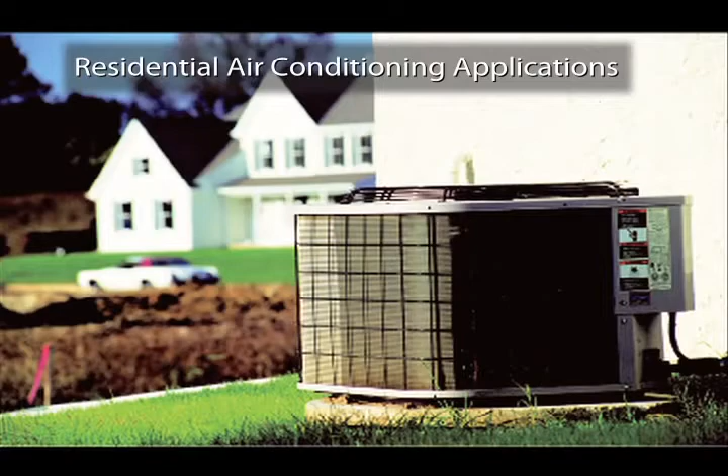Today we're going to look at Danfoss's TR6 thermostatic expansion valve. The TR6 is an air conditioning thermostatic expansion valve and is sold to many leading U.S. residential air conditioning manufacturers for use in their products.

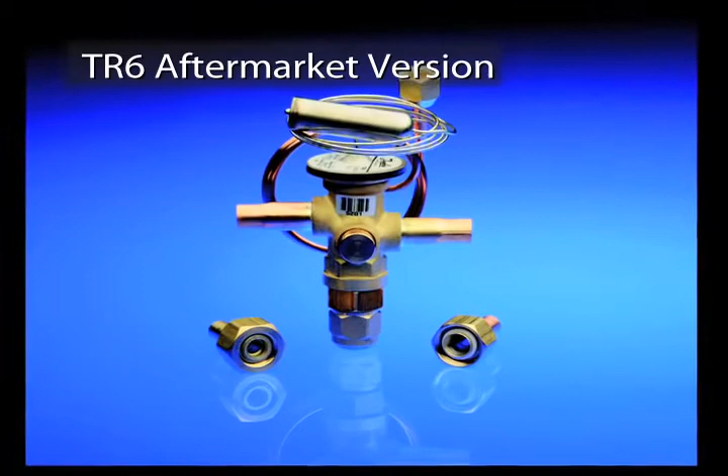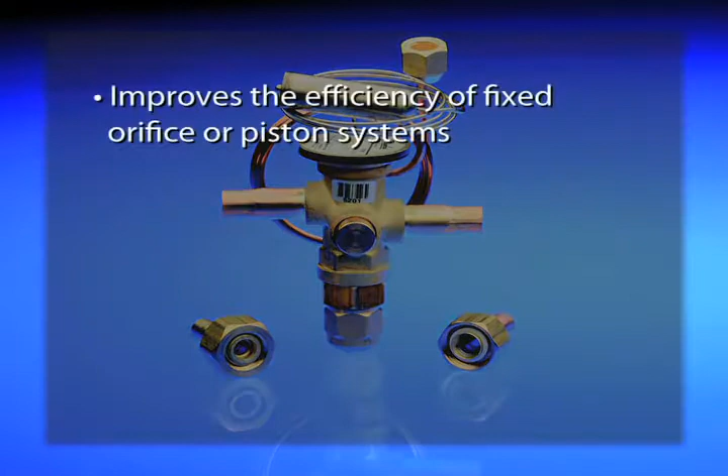However, Danfoss has also created a version of the TR6 that is designed especially for aftermarket use and includes additional fittings to simplify installation. The aftermarket version of the TR6 is typically used for four primary purposes: to permit a contractor to improve the efficiency of a fixed orifice or piston residential system, as an easy replacement for an OEM thermostatic expansion valve, to improve the efficiency when installing a new aftermarket evaporator cased or uncased coil, or to maximize system efficiency when replacing an outdoor condensing unit.

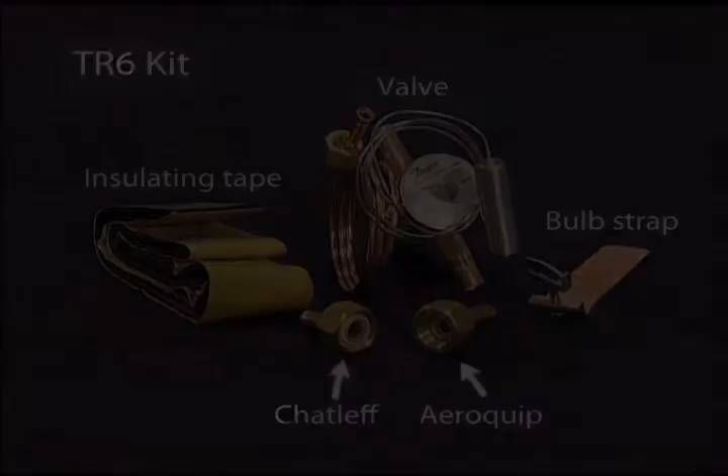The TR6 kit comes with everything needed for installation, including a valve, bulb strap, insulating tape, and the two most common types of evaporator fittings, Aeroquip and Chatleff. With these two fittings and the valve's 3/8-inch ODF connections, the TR6 is an ideal replacement for most air conditioning thermostatic expansion valves. And the aftermarket version of the TR6 has a superheat spindle that can be adjusted when necessary to meet a system's needs.

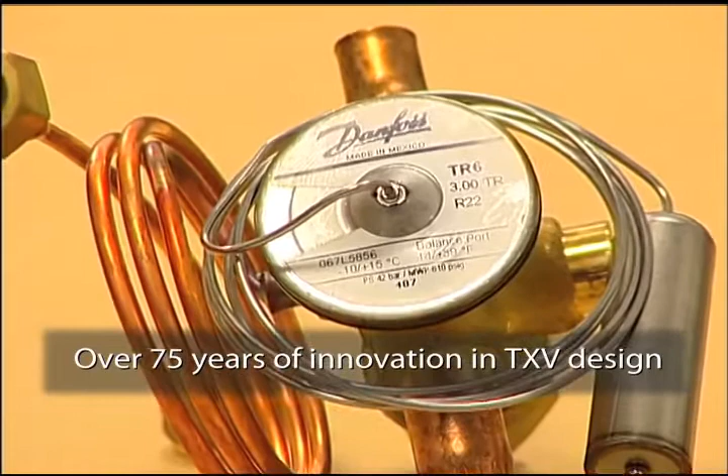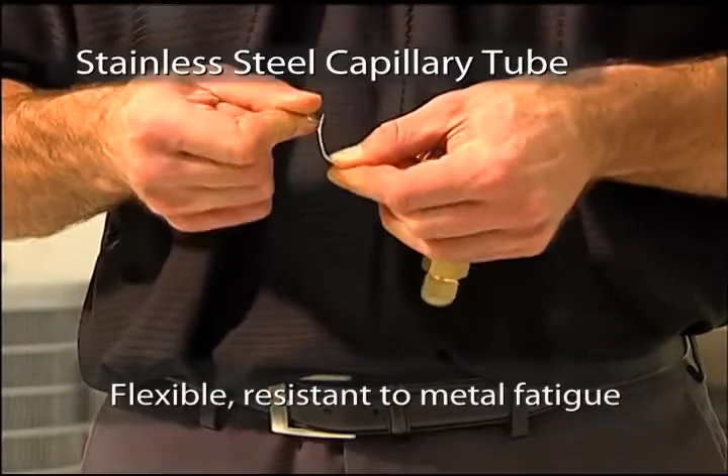The power element is a result of Danfoss's 75 years of innovation in TXV design. We've identified the most common power element failure points and designed them out of the valve. Because we use stainless steel for its construction, the cap tube is less likely to break due to this metal's flexibility and durability, and the power element will not rust due to stainless steel's resistance to corrosion.

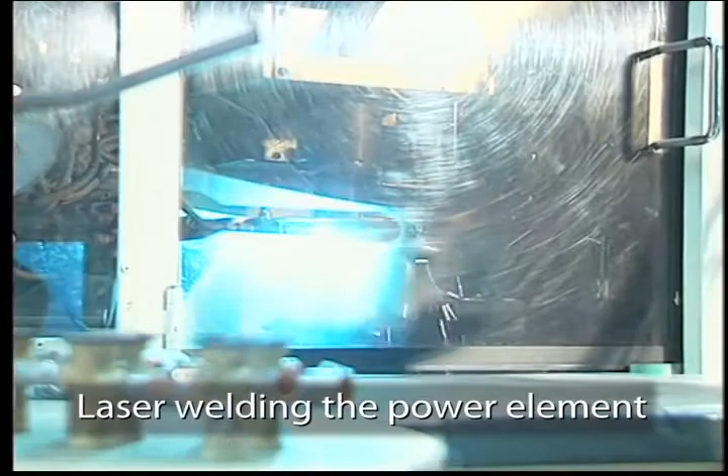Danfoss laser welds the power element rather than using plasma welding. Unlike other welding processes, laser welding directs heat only to the joint and reduces metal fatigue to the diaphragm, which means the diaphragm is less likely to fail prematurely.

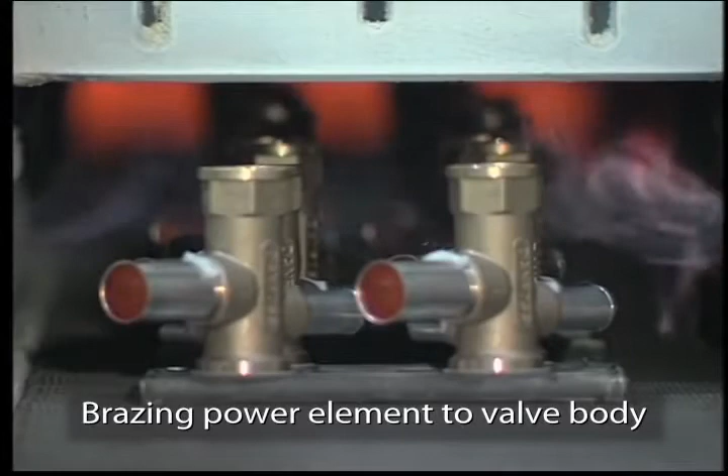By brazing the power element to the valve body, Danfoss has eliminated the primary point of refrigerant leaks in TXVs. Also, a brazed power element prevents outside debris from coming into contact with the diaphragm, something very likely given the dirty environment in which TXVs are typically installed and serviced. Very small particles of debris have been shown to rapidly wear through the diaphragm, greatly reducing TXV lifespan.

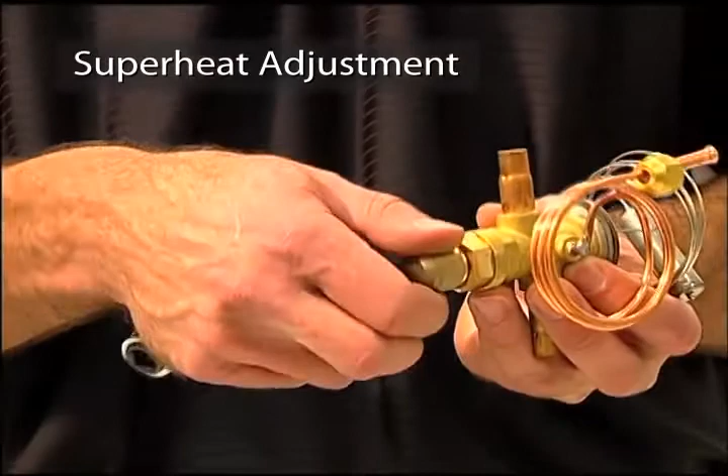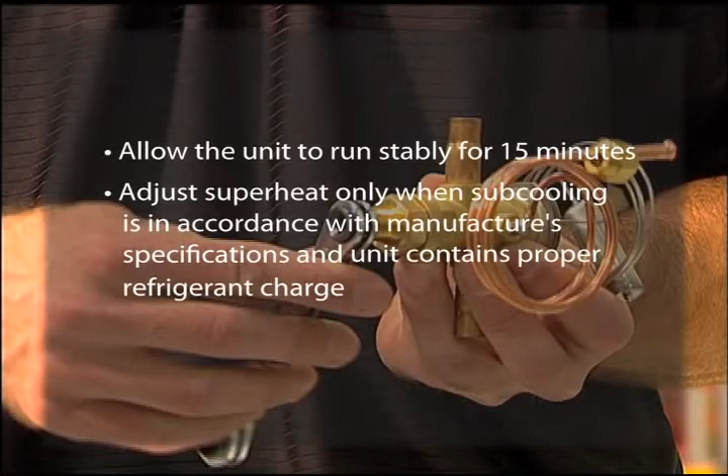The superheat spindle is located on the bottom of the TR6 valve. Please keep in mind that superheat adjustments are rarely needed, as the valve is preset at the factory. Before an adjustment is made, allow the unit to run stably for 15 minutes to check subcooling. Superheat should not be adjusted until subcooling is in accordance with the manufacturer's specifications and the unit contains the proper refrigerant charge. If a superheat adjustment is still required, use a standard refrigeration wrench to make adjustments.

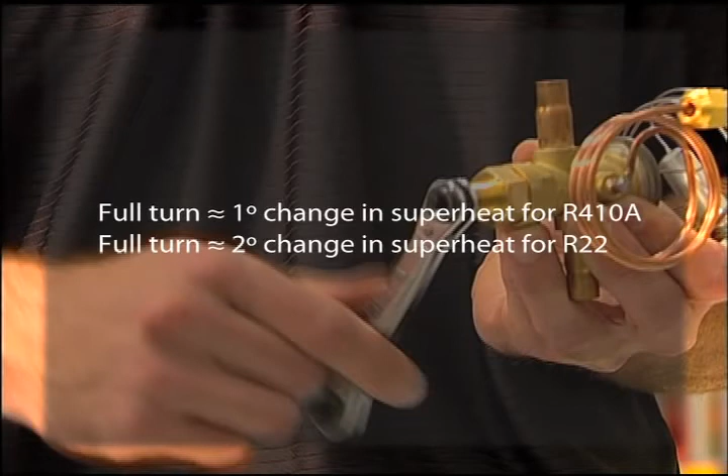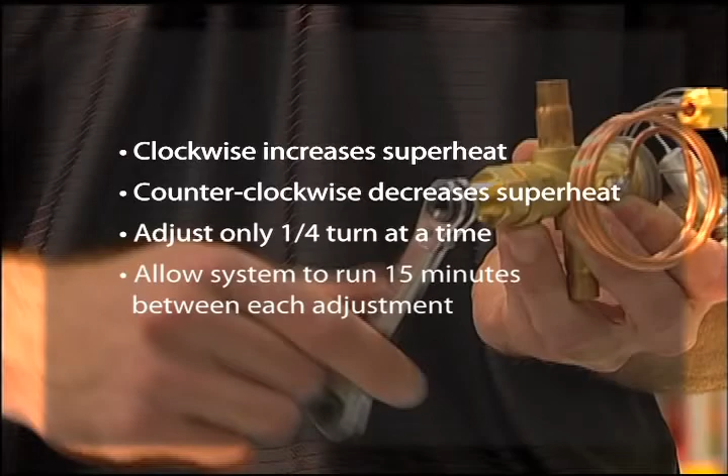A full turn will produce about a 1-degree change in superheat for R410A and a 2-degree change for R22. Turning the spindle clockwise will increase superheat. Turning it counterclockwise will decrease superheat. Please note that when adjusting the superheat, the installer should only turn the spindle a quarter turn at a time and allow the system to run for approximately 15 minutes or until they see stable superheat before making any additional adjustments.

The aftermarket TR6 also has a built-in check valve to permit its use in reversible heat pump split applications. This means the valve will only meter refrigerant in one direction and bypass refrigerant in the reverse flow.

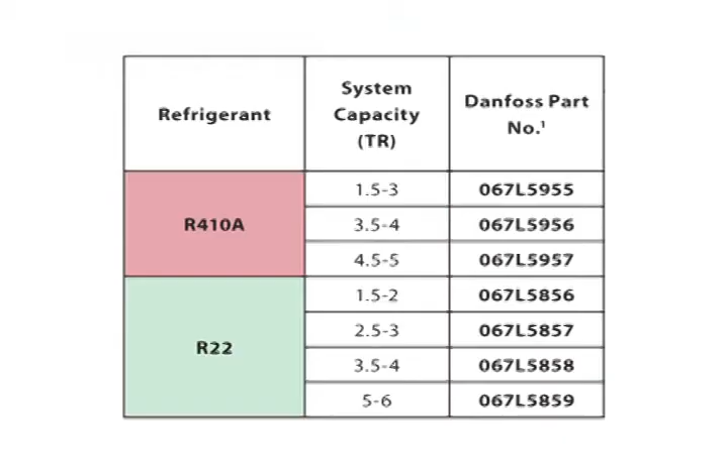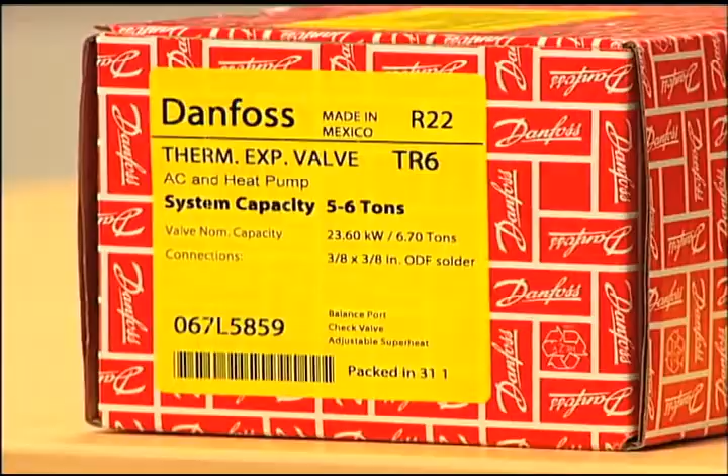Selecting the right TR6 for the job is simple. You only need to know the system's capacity and the refrigerant being used. Each TR6 package clearly identifies the system capacity for which the valve was designed. The TR6 was developed with a unique MAH charge that limits migration and allows for slow opening and quick closing of the valve.

This means the valve is less likely to hunt during changes in evaporator load, permitting the system to establish ideal conditions faster and reducing the chance of flooding the compressor with liquid. The TR6 also includes an equalization line to ensure proper function despite large drops in pressure across the evaporator and distributor, which are typical in residential AC systems.

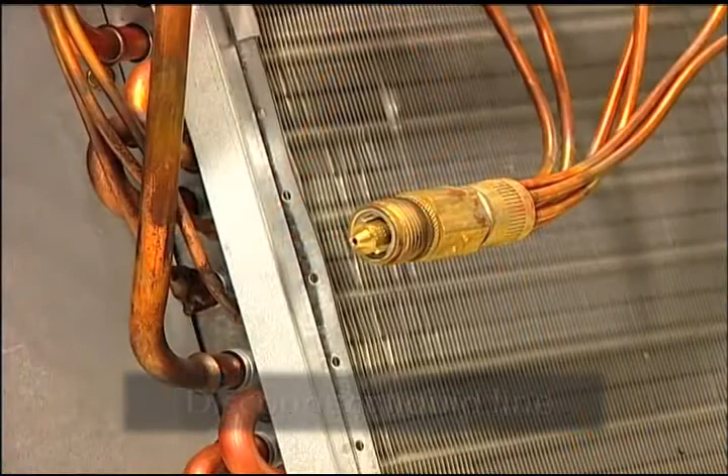Barring any unforeseen complications, installing the TR6 is quick and easy. Let's take a look at a typical installation of a TR6 on an indoor A coil. First, pump down the refrigerant charge in the unit into the condenser or recovery cylinder. Next, disconnect the liquid line from the metering device and remove it from the system. If a piston is installed, as it was in our unit, be sure to remove it.

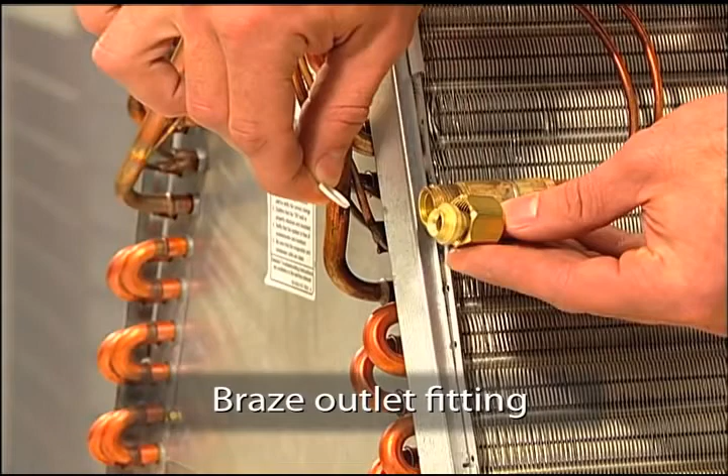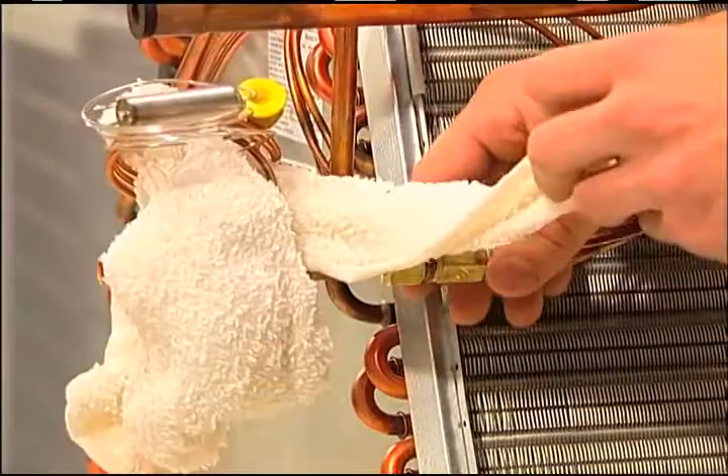Next, it's time to braze the outlet fitting you've selected to the TR6 outlet port. If the coil is equipped with a Chatleff fitting that requires a Teflon O-ring, remove the O-ring prior to any brazing. In this case, our technician is loosely connecting the fitting to the distributor for stability during brazing. Be sure to wrap the body of the TR6 with a wet towel or use heat block paste to protect the internal components. Also be sure to keep the sensing bulb and capillary tube away from the heat.

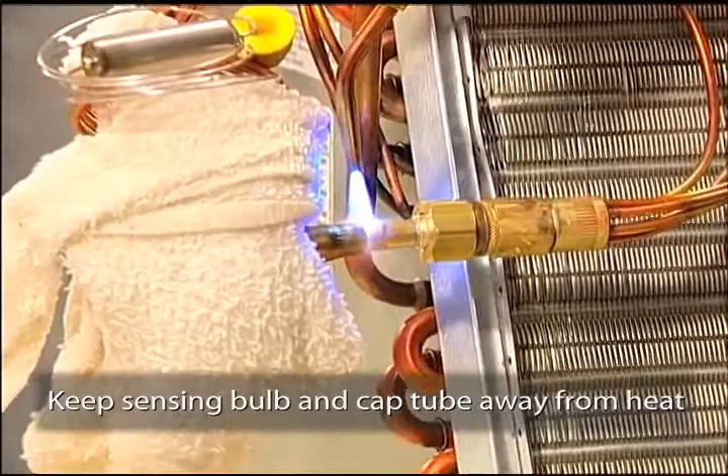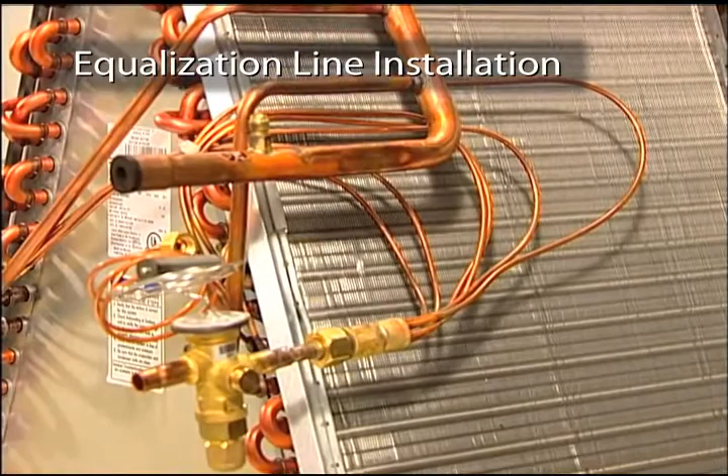After brazing the female connector, keep the towel in place while you sweat the connector to the existing 3/8" liquid line pipe. Remove the towel, replace the Teflon O-ring if equipped, and tighten the outlet coupling. Now the sensing bulb and equalization port can be installed. The sensing bulb and equalization line should be installed on the suction line after the header.

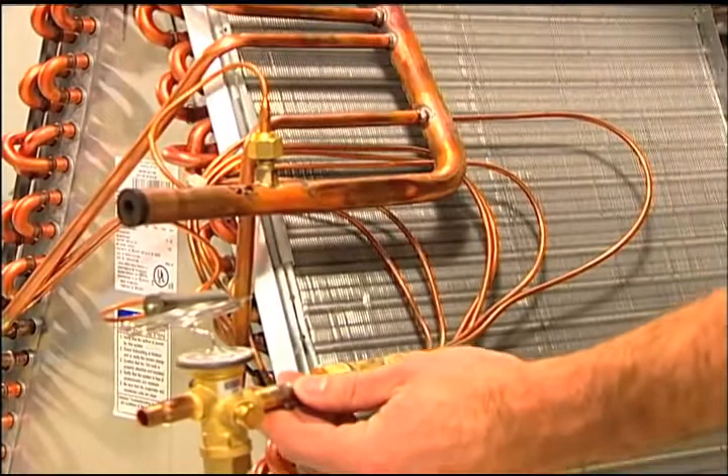This unit already has the 1/4" male flare access fitting installed. Connect the tube to an existing access port or make a suitable connection by either brazing a port into the line or installing a copper T. Never install the equalization tube on the bottom side of a horizontal pipe as oil can clog this port.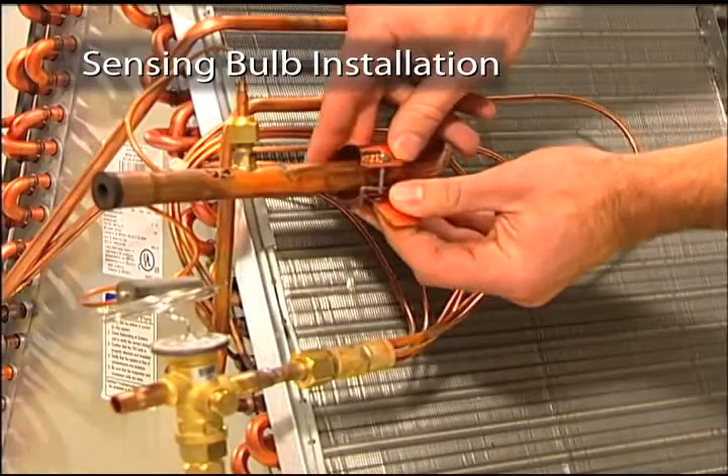Now locate a horizontal section of the suction line and place the temperature sensing bulb on the top of the pipe. Locate the bulb between 10 and 2 o'clock position. Mount the capillary tube facing upwards using the patented copper strap included with the valve. Tighten the bulb onto the pipe. This will create a slight indentation into the suction line, which ensures excellent heat transfer. Completely wrap the bulb and all exposed ends with the insulation tape that is included with the TR6. This will ensure that the bulb is sensing the refrigerant and not any ambient temperatures.

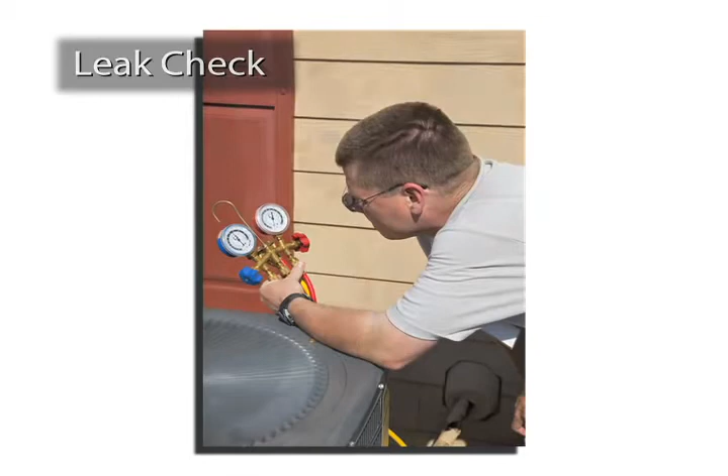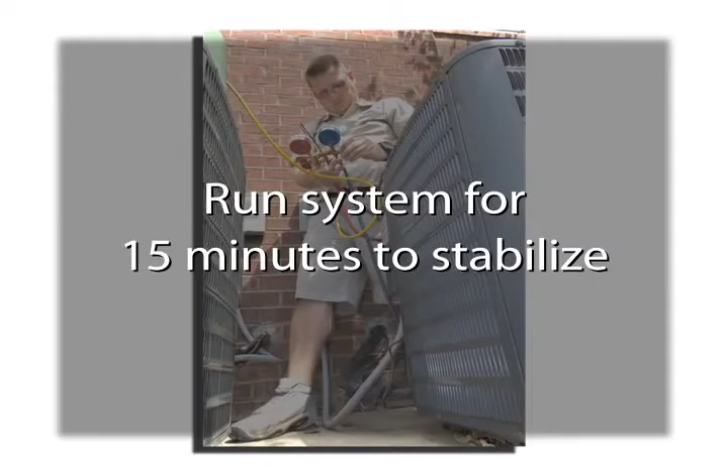Now, with the TR6 installed, perform a leak check on all connections. After ensuring there are no leaks, you can properly charge the system, making sure there is the correct amount of subcooling. Finally, let the system run for 15 minutes for stabilization before checking the superheat. That's it. It's as easy as 1, 2, 3.

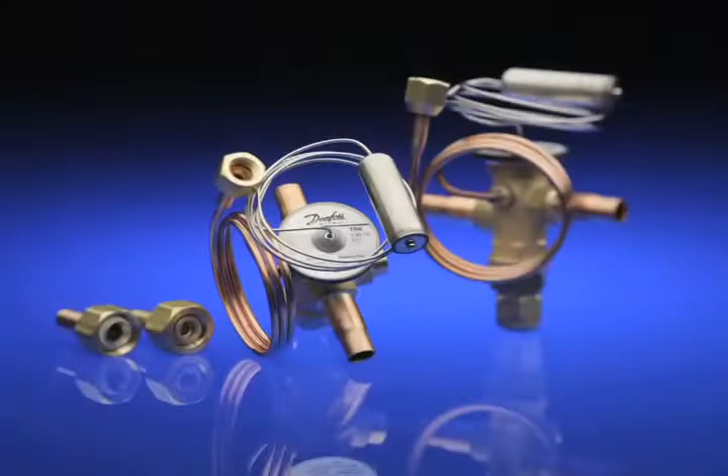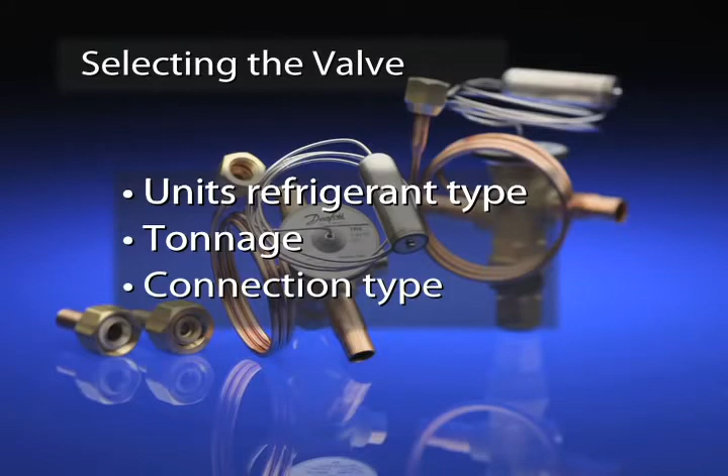Remember, the Danfoss TR6 valve's flexibility ensures that you'll always have the right valve for the job on hand. All you need to know to select the right valve is the unit's refrigerant type, tonnage, and connection type. It's that simple. Keep in mind that Danfoss offers 2 convenient kits of these valves to ensure you always have the right valve for your job on hand. The first includes all 3 R410 TXV kits. The second includes all 3 R22 TXV kits.